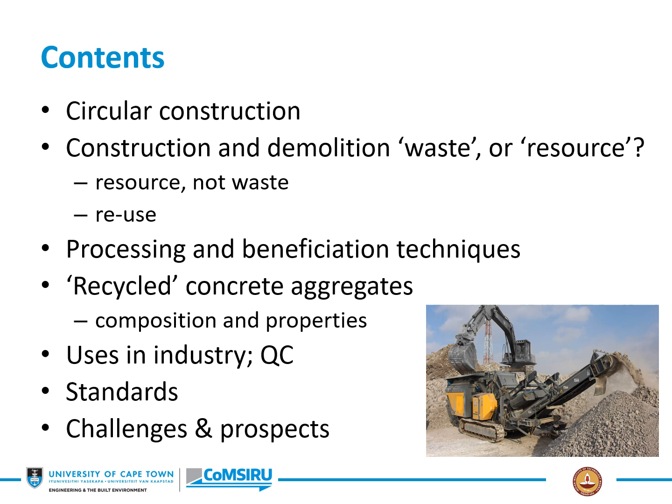This is what I'd like to cover: circular construction, and then construction and demolition waste - or is it a resource? Then processing and beneficiation techniques, recycled concrete aggregates, something on their composition and properties, uses in industry and quality control, standards, and challenges and prospects.

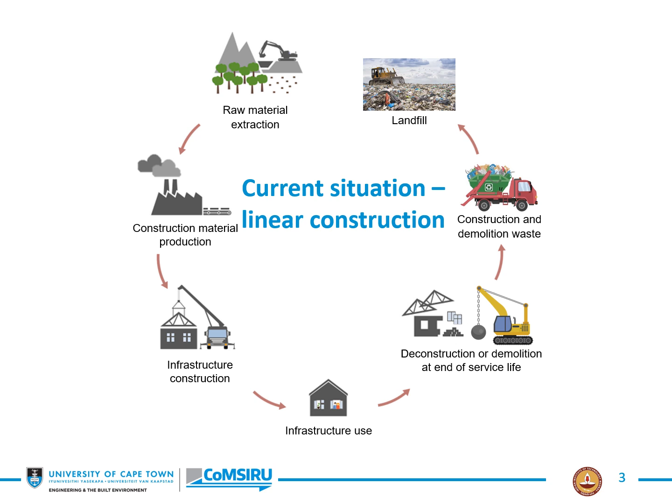This is the current situation in construction in most of the world: linear construction. Although this is a circular diagram, in fact it's a linear system, because from raw material extraction through the construction phase and then the deconstruction phase, we'll end up in the landfill, and that's a linear system. This is no longer acceptable.

We need to move to a circular construction system where, at this stage at least, we intercept the waste stream, process and beneficiate it, and turn it into useful materials - in this case, possibly recycled aggregates. We could, of course, stop at this point and deconstruct the system and even use whole structural members again, but this system is now required.

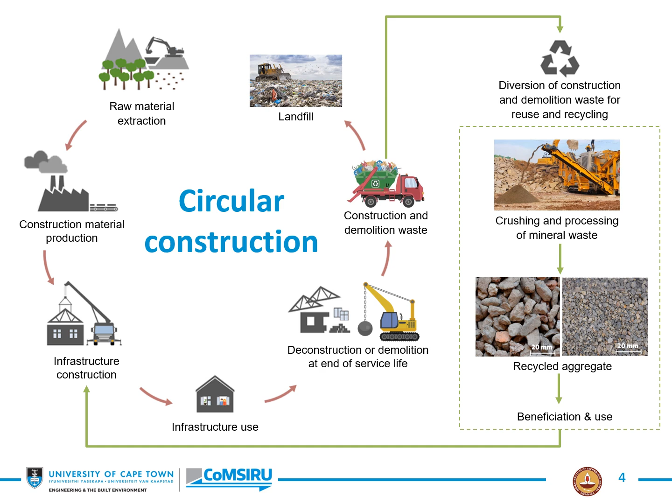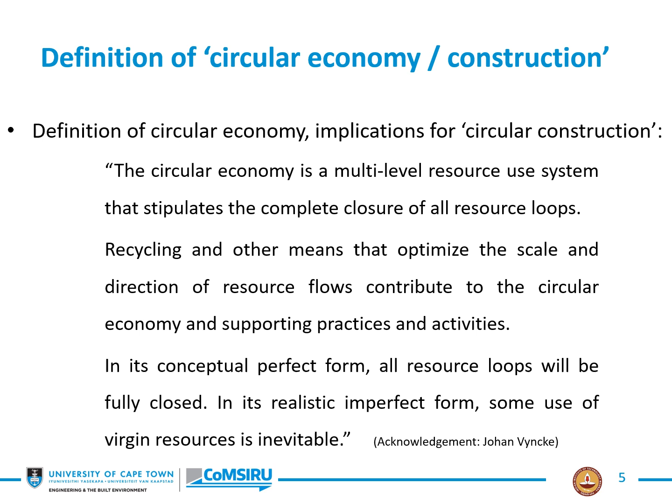Here's a definition of the circular economy, or circular construction, if you like. The circular economy is a multi-level resource use system that stipulates the complete closure of all resource loops. Recycling and other means that optimize the scale and direction of resource flows contribute to the circular economy and supporting practices and activities. In its conceptual perfect form, all resource loops will be fully closed. In its realistic imperfect form, some use of virgin resources is inevitable. And I acknowledge Johan Vyncke for that quotation, past president of Rilem.

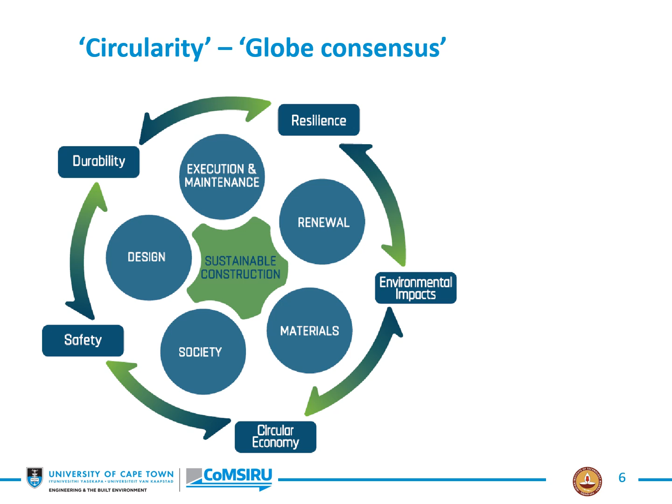We might also be well aware of this diagram from the Globe Consensus, where circularity is defined. Here's sustainable construction - these are the elements that contribute to sustainable construction, and the other aspects here around durability and so on and so forth. What we need in the end is functional, durable, and resource-efficient concrete, including use of recycled aggregates.

So let's talk about construction and demolition waste. It's the non-hazardous waste produced during the construction, repair, rehabilitation, or demolition of infrastructure. And it is of variable composition - usually it's some sort of mineral waste or building rubble, but that contains, for example, clay bricks, wood, possibly plastic, and usually metal of some kind, and so on.

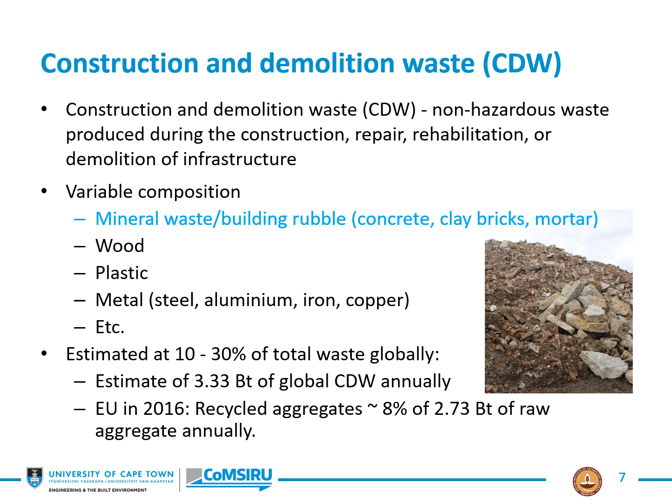Importantly, it's estimated at 10 to 30% of total waste globally. That's a huge number - this depends on the country or the region. There is an estimate of about 3.33 billion tons of global CDW annually, again a large number. Taking the EU in 2016 for example, of the total of about 2.73 billion tons of raw aggregate that was consumed then, only about 8% comprised recycled aggregates. So clearly there's room for improvement here.

But waste here really is a resource, and if we begin to view it as a resource, it leads to a new mindset. For example, the stimulation of a secondary resource economy based on the recovery of material and energy resources from that waste. Also, it's a resource because in this sense we reduce the waste sent to landfill, we reduce the exploitation of non-renewable resources, and we have improved efficiency of material resource flows.

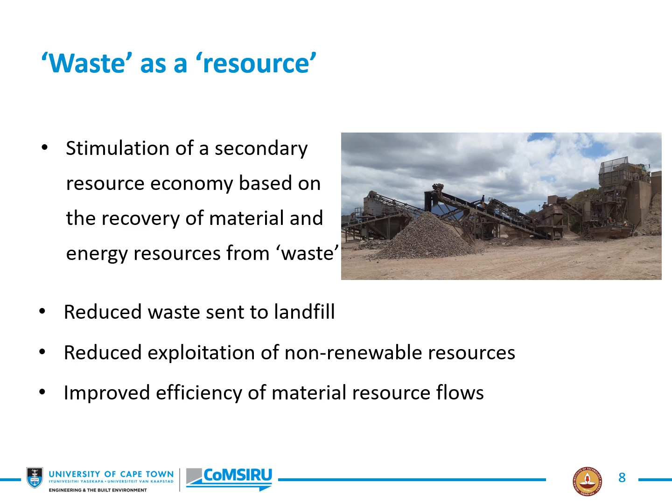Turning to South Africa and CDW in our country, around 4.5 million tons is produced annually, but this could be as high as 10.8 because these numbers are somewhat unreliable. And as of 2017, only about 19% was recovered or reused.

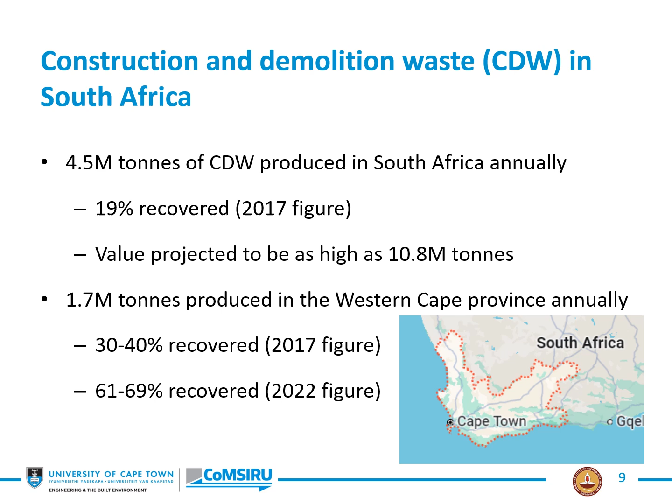And the simple reason was - well, there were two reasons. First of all, the city required a demolition certificate from every owner or whoever was demolishing a building, in which they had to indicate what they would do with the demolished material, indicating reuse. Secondly, the gate fees for the landfill sites were largely increased. And so within the space of a year, this situation was turned around. So it's interesting to see what can be done with proper legislation, proper regulation, and proper motivation.

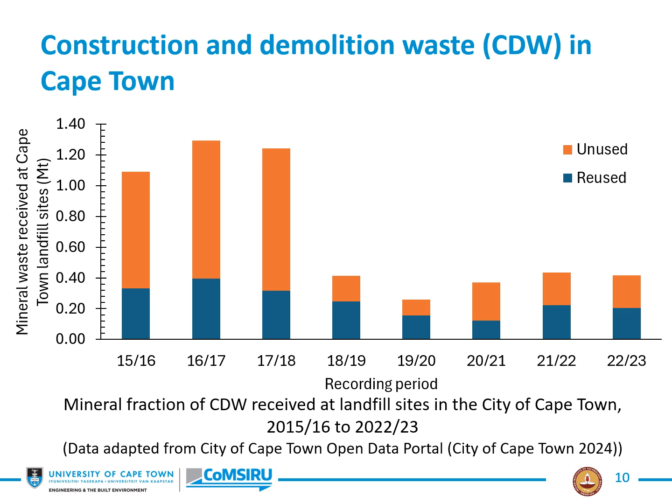Now, with regard to processing and beneficiation techniques, we start with the collection of C&DW. This is an illustration of Chennai in Tamil Nadu in India, where I've just come from spending 3 weeks with colleagues. These dots represent the waste generation points in Chennai in 2013, and you can immediately see the problem: there are multiple sources of C&DW throughout the city, so it's very difficult to collect this economically. What is really required is for the local authority to designate maybe half a dozen or a dozen collection points where people are required to take the C&DW, and from there one can make use of it much more easily than trying to collect it over such a wide and dispersed area.

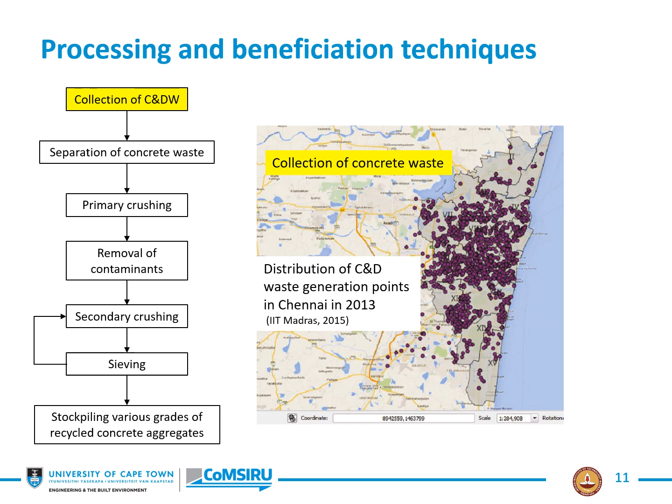That then, of course, one needs to separate it. Here's an example from our own city. There are the mountains in the background, where you can see some mixed waste. Here is some more or less concrete waste, but some soil over there. So really what you want to do is separate at source and not include this in your recycling material.

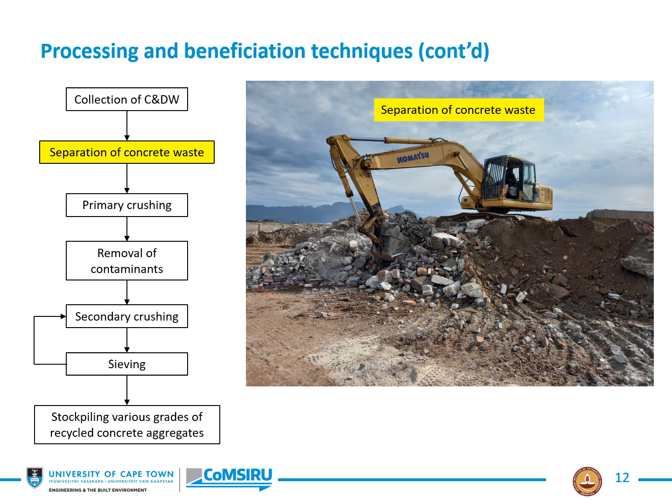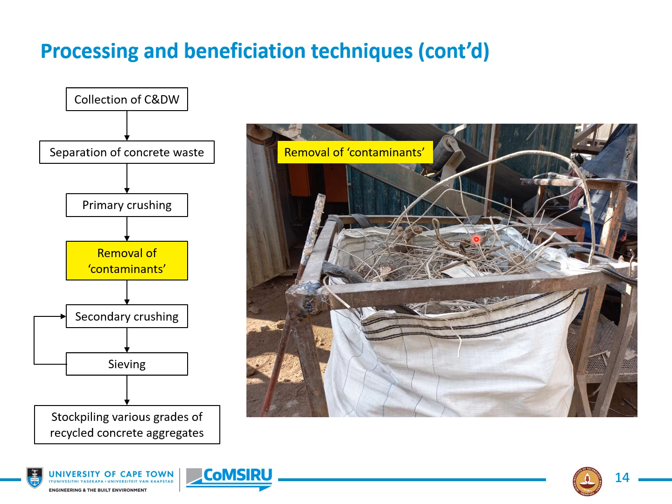Once you've done primary crushing, normally this would be a jaw crusher, which breaks down the large particle sizes, and also removal of contaminants. In this case, you can see the steel reinforcing that has been removed, and of course that itself can be recycled. There are certainly other contaminants that may need to be removed, very often indeed by hand.

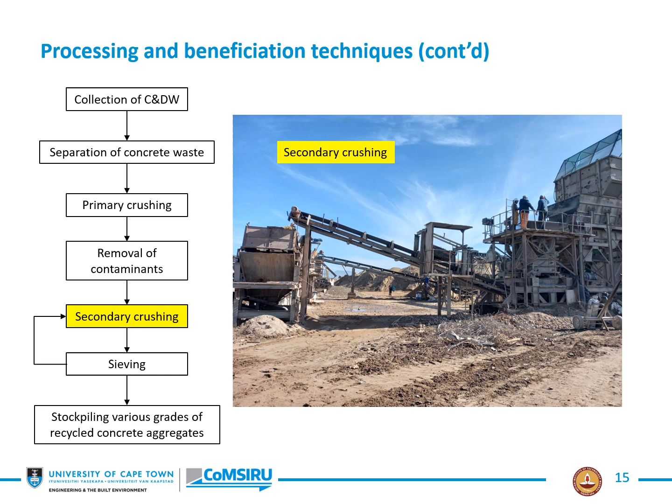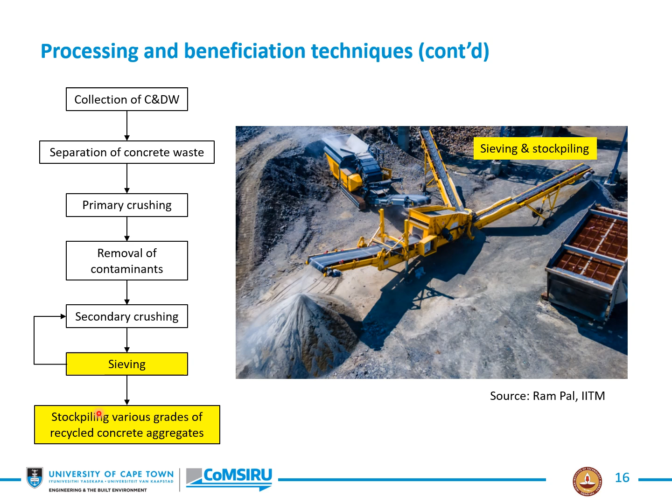One then moves to secondary crushing, and this is also an example from our own situation. Here is a secondary crusher, maybe a vertical impact crusher or something similar, that allows better separation and better particle shape. And then into sieving. So here is a mobile crusher, here is a mobile sieving machine, where from the crusher the stream is then separated into coarse aggregate, or recycled aggregate, and fine material. So we land up with stockpiles of various grades of recycled concrete aggregates.

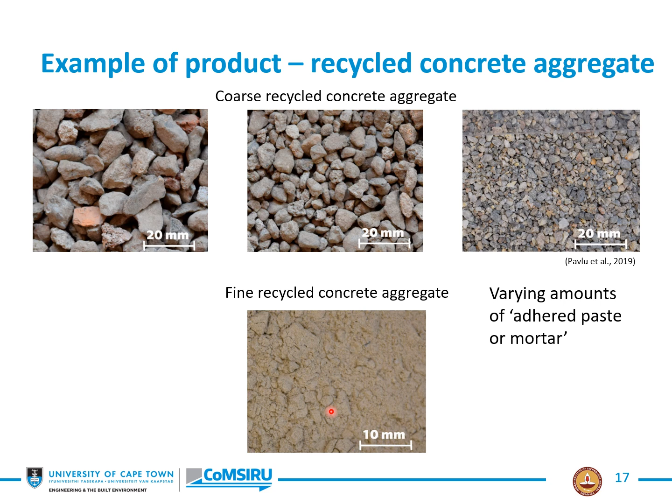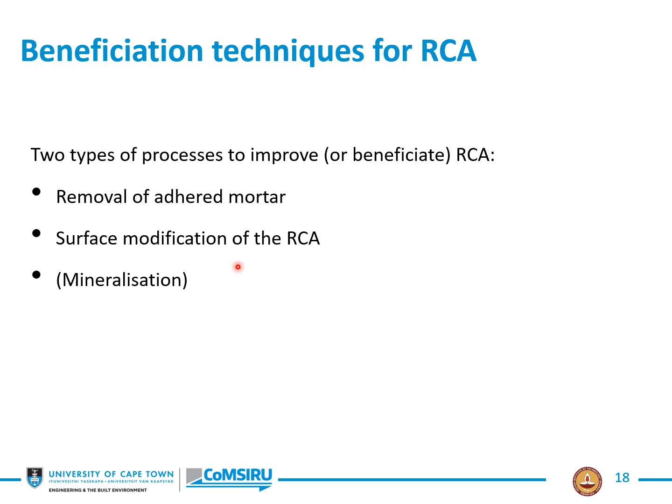There are 2 processes we can use to try and improve or beneficiate the recycled concrete aggregates: removal of the adhered mortar, because it is a problem, or surface modification of the recycled concrete aggregates. Thirdly, there's also mineralization, but I won't deal with that here. For removal of adhered mortar, one can do mechanical scrubbing, acid soaking (not a particularly good idea), microwave heating, conventional heating, or possibly ultrasonic water cleaning, which is also not a very useful idea.

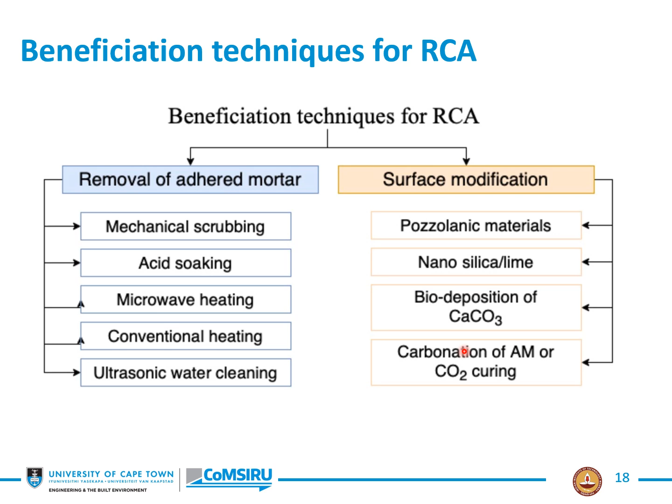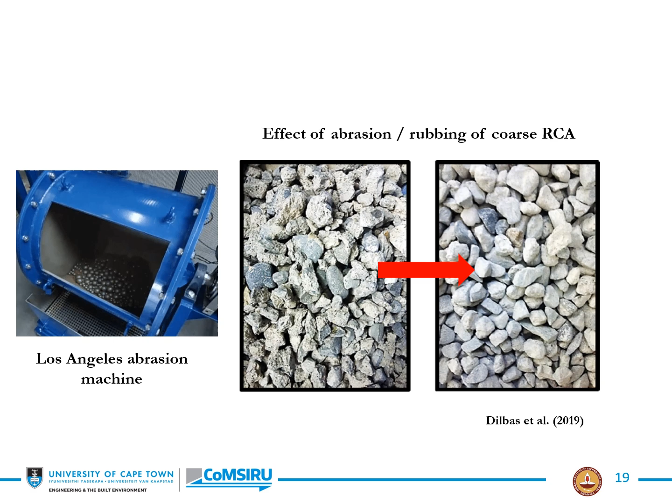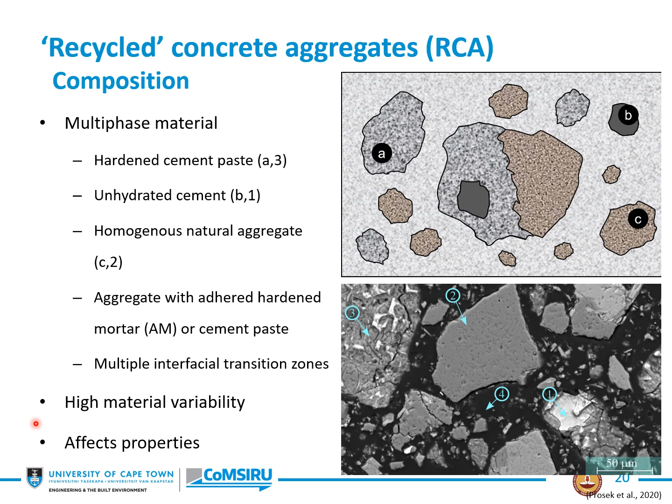The composition depends on the properties and composition of the parent concrete, the crushing procedures, the number of crushing stages, and the end particle size of the recycled concrete aggregate.

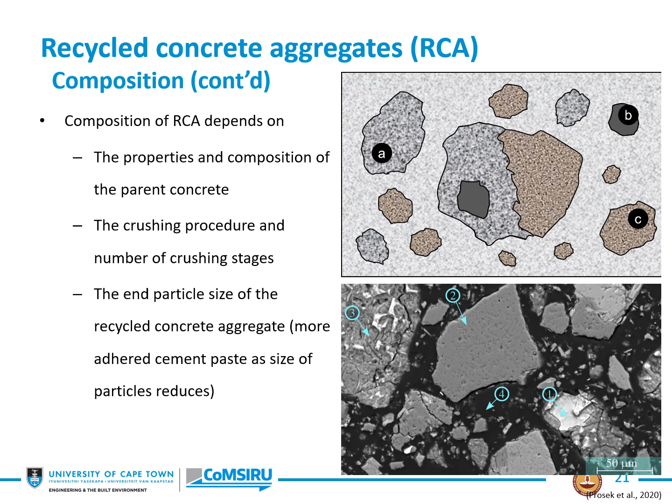As the particle size reduces, you get more of this adhered mortar. Here's a micrograph of the situation. There, in fact, is the adhered mortar and the original aggregate particles. If you just look at this section here, here is the original aggregate with some adhered mortar sticking to the surface, and a whole lot more over here.

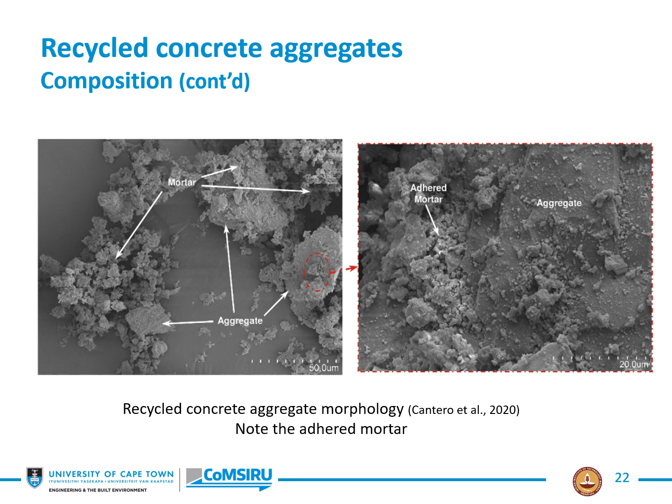This is the material we have to handle in terms of beneficiation. So if we compare recycled concrete aggregate with natural aggregate, we find that it has higher porosity, due to the adhered mortar, lower density, higher water absorption, and higher abrasion loss. As I've said, this is all largely due to the cement paste phases, including the ITZ phases.

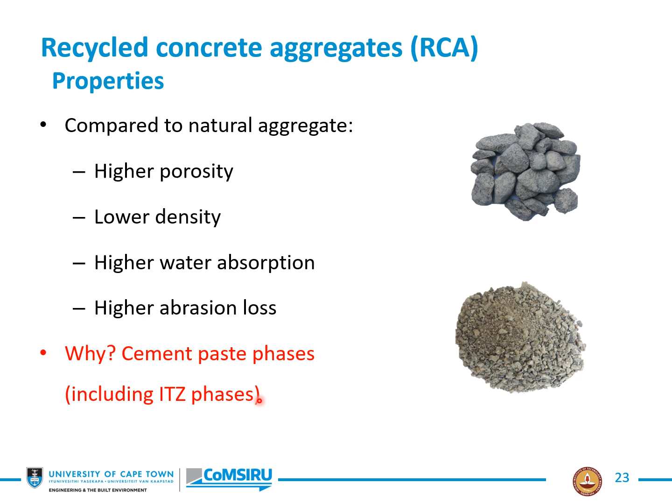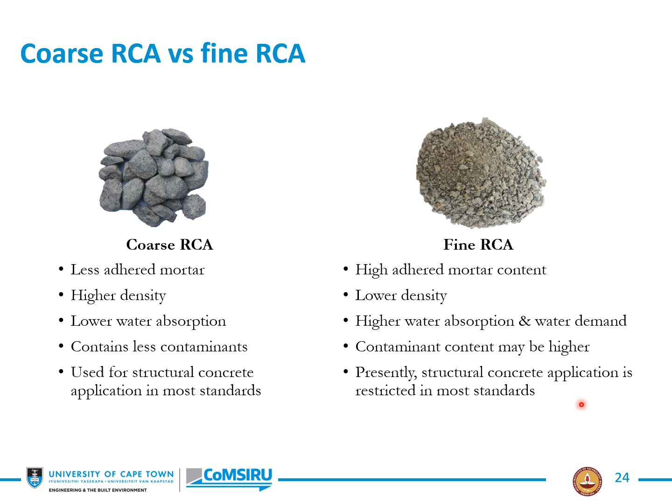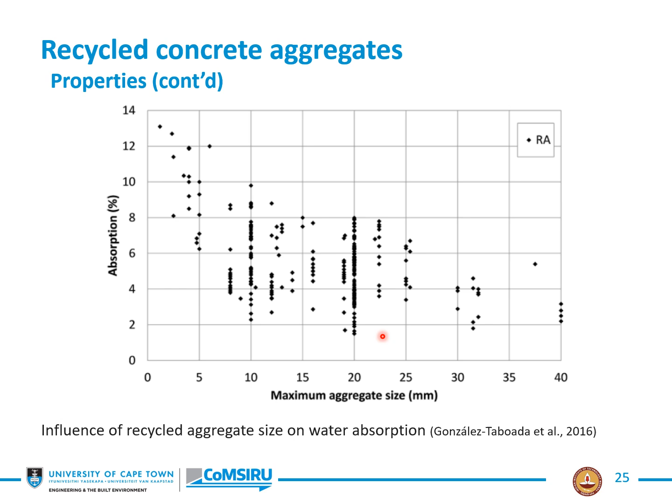For normal crushed hard rock aggregates, bear in mind that the absorption is typically a maximum of around 1%. Normally in South Africa with our hard rock crushed aggregates, we're at around 0.5%, so quite low. So even with this size of aggregate here, around 20-25, you can see that the absorption can be considerably higher than natural virgin aggregates crushed from hard rock.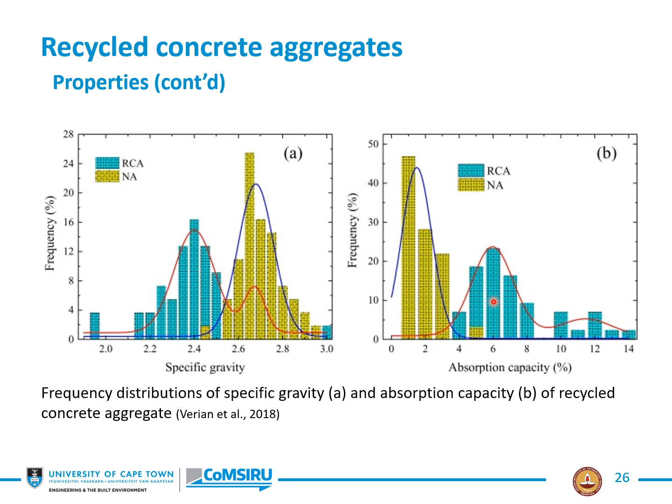This is also illustrated here where we have these frequency plots of recycled aggregate versus natural aggregate. In the specific gravity or relative density plot, obviously the natural aggregate has higher relative density, whereas the recycled aggregate is lower. The other picture is in terms of absorption: the natural aggregate has low absorption, the recycled aggregate has relatively high absorption.

This is also well illustrated in this diagram with absorption versus specific gravity or relative density from a whole series of studies. Here you can see, for example, that the coarse natural aggregate falls down in this area. We then have the coarse recycled aggregate, with higher absorption and lower relative density. And moving up, for example, the fine recycled aggregate is up in this region here, which has high absorption and low relative density.

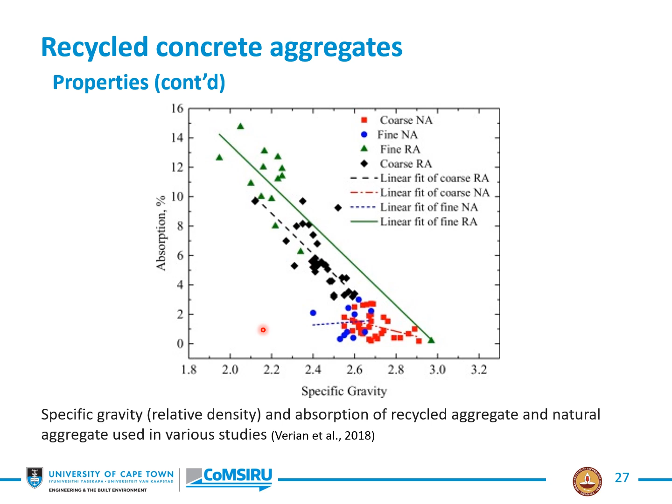Now, structural engineers are always interested and concerned about compressive strength. So what does that mean? Well, here you can see again a high variability of results from a series of references.

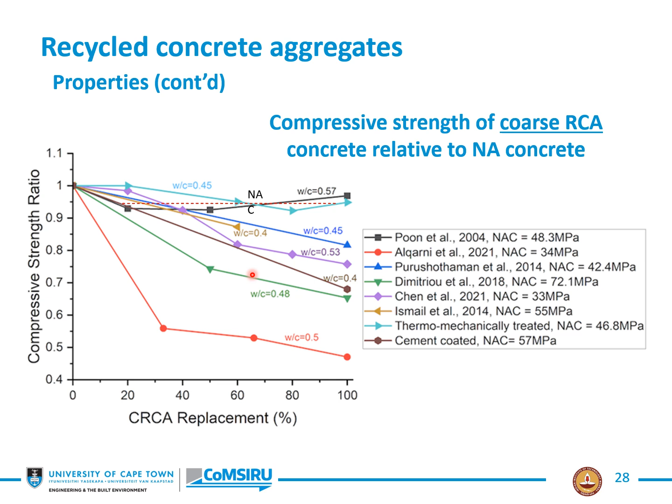The important thing to note is that in many cases, or certainly in some cases, it's possible to get very little reduction in compressive strength of the final concrete, even at 100% coarse recycled aggregate replacement. On the other hand, you can see in this plot, or even some of these, there can be a very substantial effect on compressive strength, which is obviously what we don't particularly want.

With fine recycled aggregate, the same picture emerges, although the data is more sparse. Here you can see again that it's possible to, even at 100% replacement, get reasonable values for compressive strength, but at the same time it's possible to get large reductions in compressive strength. So what this tells us is that every case needs to be considered on its merits and judged accordingly.

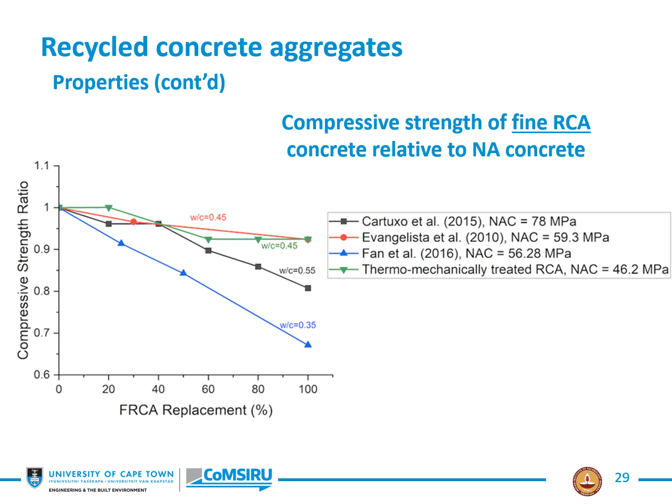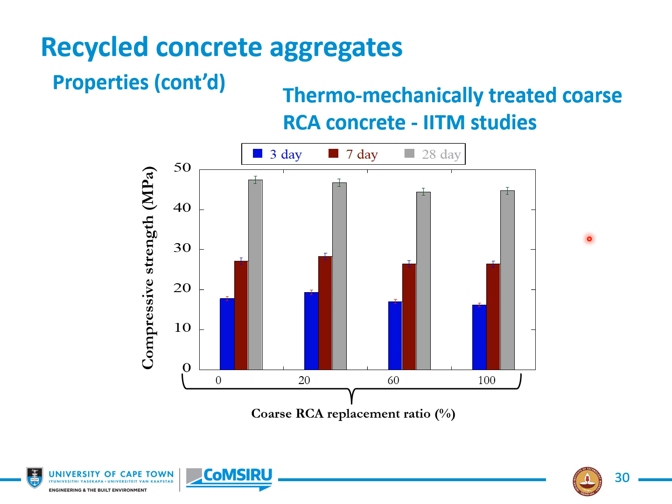Here is an example of a thermomechanically treated coarse aggregate from IITM, where you virtually remove all the adhered mortar by thermomechanical treatment. Here you can see that for 3, 7, or 28-day strength results, there really is very little difference, and this aggregate is, to all intents and purposes, similar to the original aggregate itself. This is coarse aggregate, of course.

Now here's the approach that we've tended to take at UCT, where we've treated the fine recycled aggregates with, in this case, fly ash and slag. Here, fly ash.

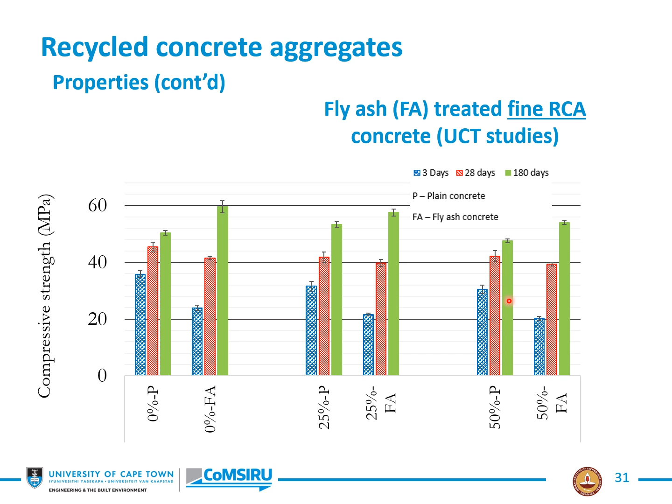Here again, compressive strength at 3, 28, and 180 days. You can see that at 180 days, there's not a lot of penalty to pay using 50% fly ash replacement in a fly ash concrete. The same is seen in early strengths, a little bit lower here.

If we look at the OPI, or oxygen permeability index, of plain concrete and fly ash mixes, this is again a fly ash mix with up to 50% replacement. There's a little reduction, but not substantially so. In other words, we're able to make up to 50% replacement of the natural aggregate and still get very good properties, even at 28 days. Bear in mind anything with a value over about 10 OPI is actually a very good concrete from a permeability or penetrability point of view.

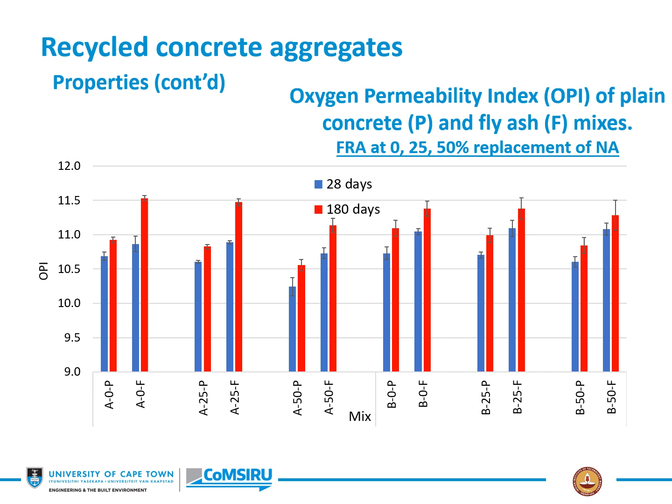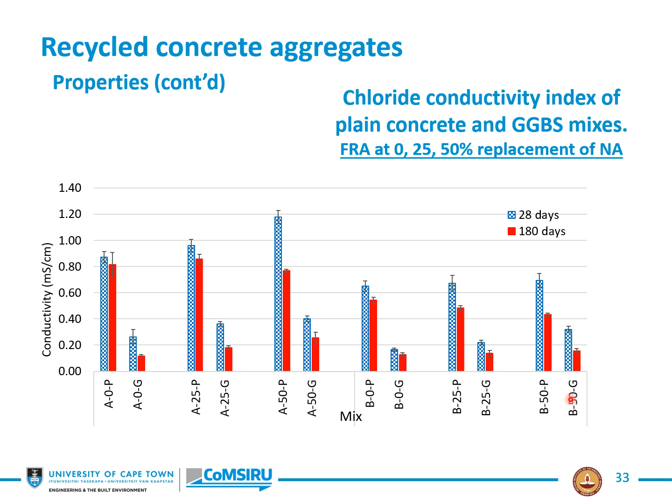If we look at the chloride conductivity index of plain and GGBS or slag mixes, the same picture emerges. The slags have very substantial effects on bringing down the chloride conductivity, as we know. But the recycling of the aggregate, fine recycled aggregates in this case, has no major detrimental effect, even up to about 50%. So it's possible to do this. This is good, and these are excellent.

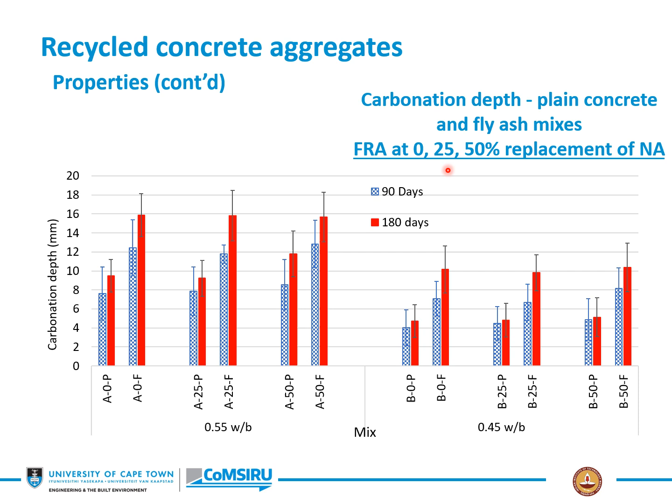Here is something on carbonation depth and two different water binder ratios. Obviously, as you would expect, the lower water binder ratio gives you the lower values. Again, the carbonation depths are not adversely affected at these different ages by the use of fine recycled aggregate at up to 50% replacement.

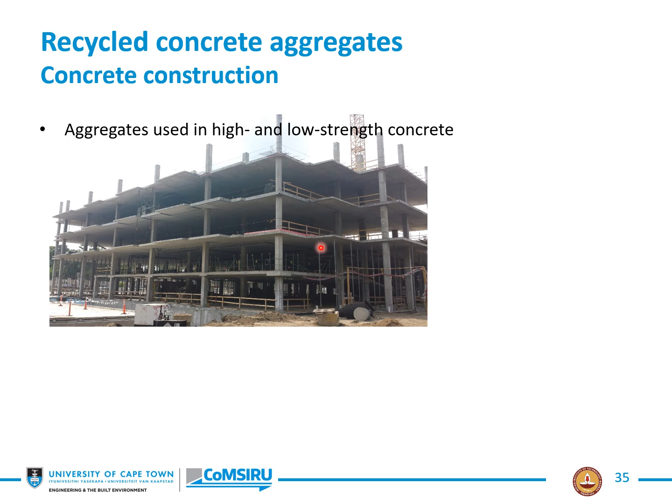So, what about use of these materials? Well, they can be used in high and low strength concretes. Here's a high strength application, a typical column and slab structure in which these materials can certainly be used, provided that they're properly beneficiated and the properties are understood.

However, in many cases, these materials land up in this type of application: brick and block construction, particularly in the developing world, where up to 80% of cement usage actually goes into these kinds of applications. This is an eminently useful and suitable use for these materials, because here the strengths are lower and therefore quality is less important, although of course not unimportant.

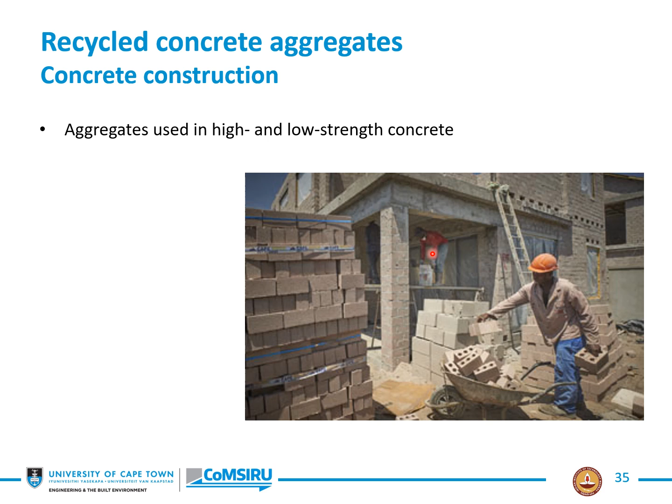But bear in mind there are other possible uses: landscaping, embankments, fill or hardcore material, other construction, or pavement construction. Here you see an example of a road base from recycled concrete aggregates, where they're going to put the topping layers on, and this is very acceptable if it's okay with the standard.

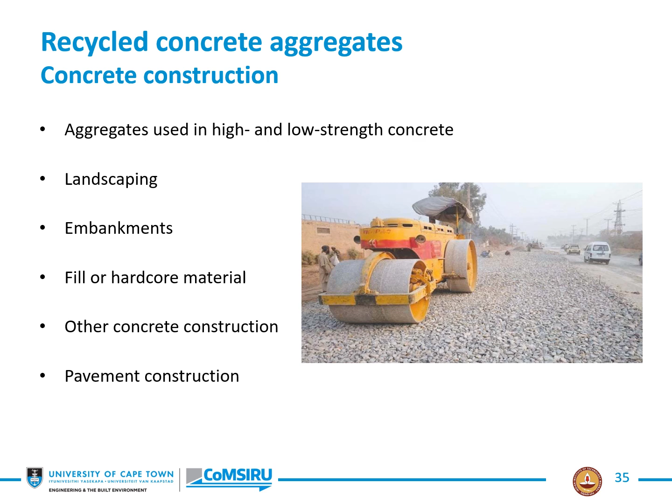Quality control is an issue, however, because we have this variable material. We have non-uniform properties; parent concrete quality and its properties will affect that, the method of crushing and processing, and of course contaminants. Even a small amount of, for example, brick can have quite a big influence on the properties of the material. So we really need to think of selective deconstruction, where we actually take out the demolished concrete at source, rather than as a mixed waste. That results in reduced contamination and improved consistency.

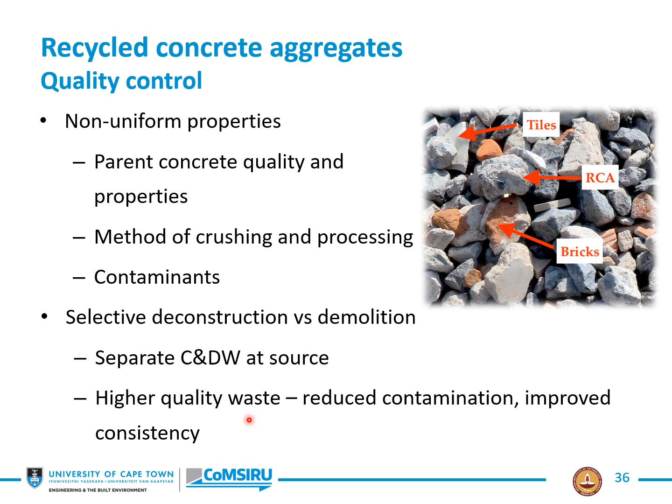So, QC, or quality control. Here are some standards just to show you what is available for the use of recycled aggregates, and there are a whole series of countries given there. Looking at India, you can see that for non-structural concrete, up to 100% of both coarse and fine aggregates are acceptable. In reinforced concrete, at this stage, only 20%.

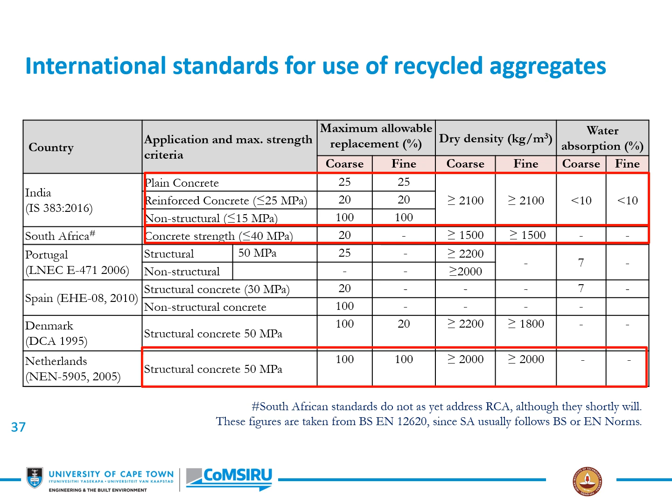In plain concrete, 25%. On the other hand, if we go to the Netherlands, or South Africa, we're a little bit behind, only 20%. But in the Netherlands, you can use up to 100% of both coarse and fine, and clearly they've made great progress here and know how to beneficiate and use their material to the greatest extent. You go to other countries, Germany and so on, Australia, Hong Kong, right down to Switzerland. Again, the picture is mixed; sometimes only low values, but in other cases, you can go up to even 100%.

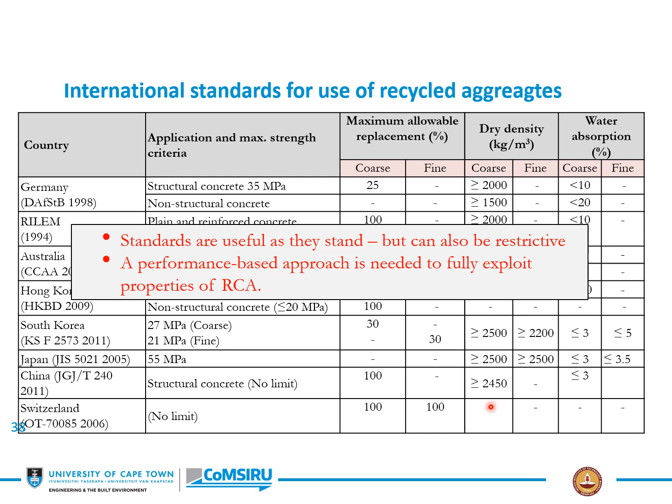Here, again, quality control is crucial to the use of these materials effectively. So standards are useful, of course, but they can also be restrictive. They can limit things when they don't need to be limited. And therefore, a performance-based approach is needed to fully exploit the properties of RCA.

What about the prospects of the use of this material? Well, the overall regional or even national situation should be in focus, considering other possible uses. What we need to do here is to optimize the entire cycle, not just the concrete cycle.

For example, it's not necessary that recycled concrete aggregates must go back into concrete. As I've explained, they can go into other uses. So one really needs to take a regional view of these things. In other words, look at a whole region, see where materials are needed, and see where one can replace virgin materials with this material if it's not likely to be used in concrete. In that way, one can optimize the use of these materials and achieve the lowest possible environmental impact.

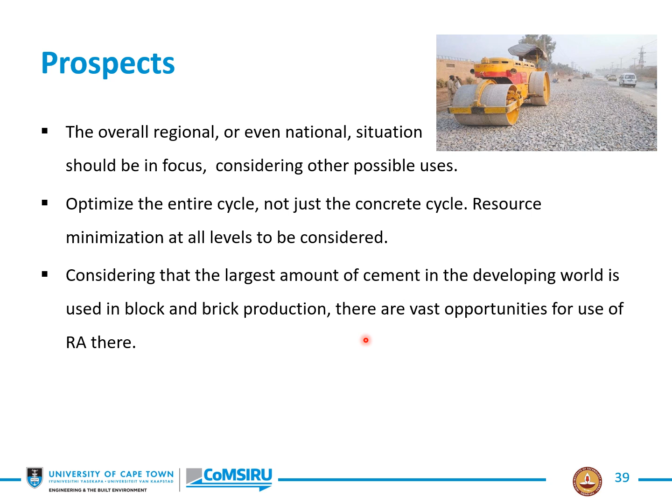That's an important fact. As I said, considering that the largest amount of cement in the developing world is used in brick and block production, there are vast opportunities for use of recycled aggregates there. Newer technologies also, such as the Loesch selective crusher, may allow much more efficient use of CDW.

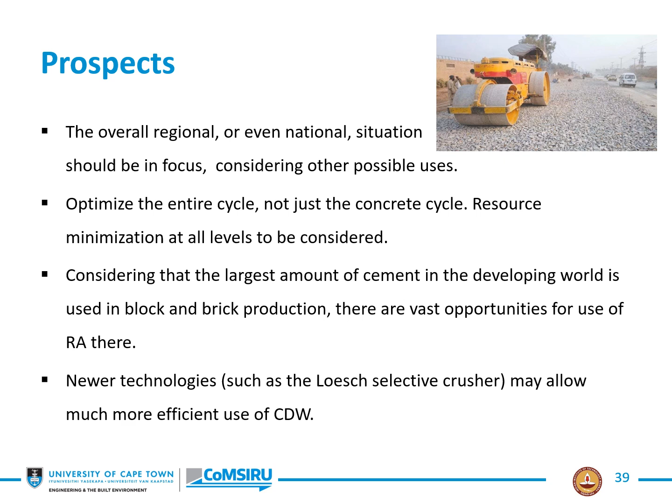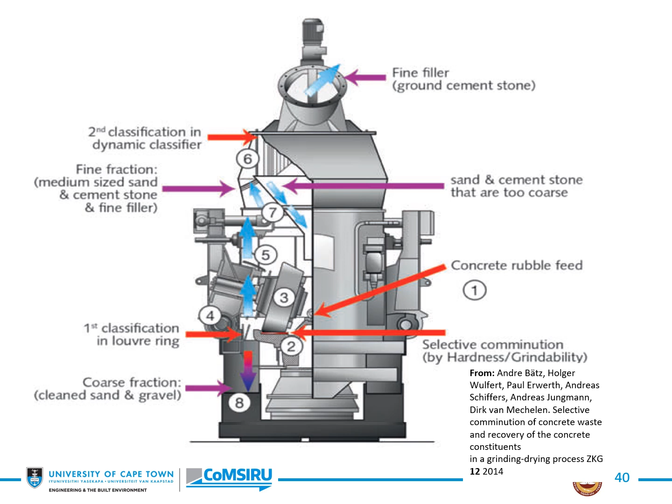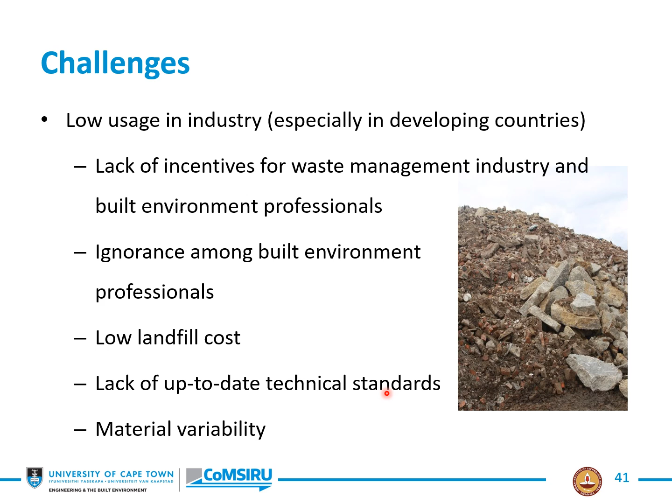Ignorance amongst built environment professionals is another challenge. The first reaction when you suggest the use of this material is, well, I'm not sure, is it going to do the job for me? Because there's simply lack of knowledge or ignorance. Low landfill costs contribute to this, along with lack of up-to-date technical standards, and that ever-present material variability that I have referred to.

But there are prospects indeed. There is a suggestion that over the long term, building obsolescence may reduce, but there is a tremendous stock of aged structures that will still need demolition in the next decades. So this material will be around for literally decades to come, and we must make the best possible use of it. Also, pressures are likely to grow to recycle entire buildings by repurposing them rather than demolition.

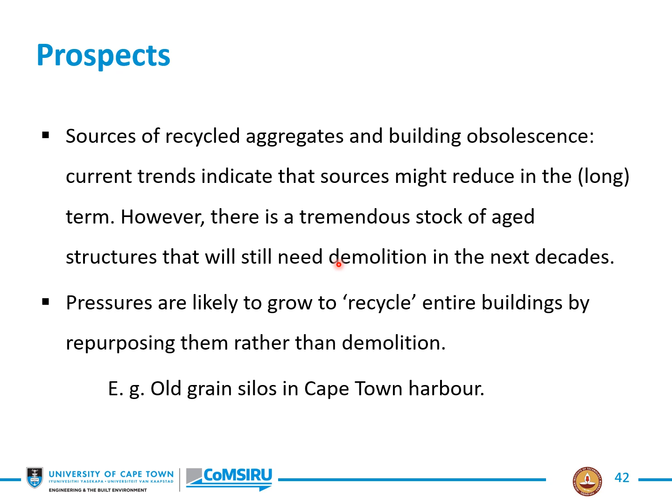This is where I love to use the example of the old grain silos in the Cape Town harbour. Here they are - about 100 years old, or they were 100 years old about 10 or 15 years ago when they were repurposed. You can see the damage due to corrosion and spalling of these structures. Obviously, they're in a marine environment, so you would expect that. The question was, should they demolish or should they repurpose those structures?

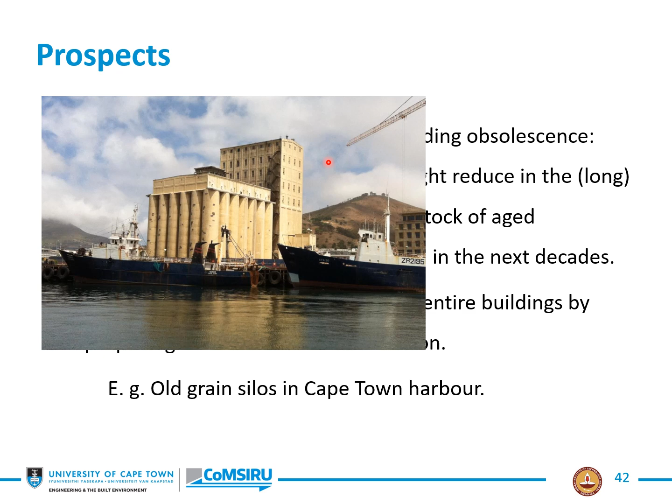The decision was to repurpose them, and you can see the effect here with the finished product. In fact, this section is now the Zeitz MOCAA Art Museum, a modern art museum which is very popular with visitors. And this is a very expensive boutique hotel where I could certainly never afford to spend a night. But you can see that it's turned into a very attractive structure that attracts many people as visitors.

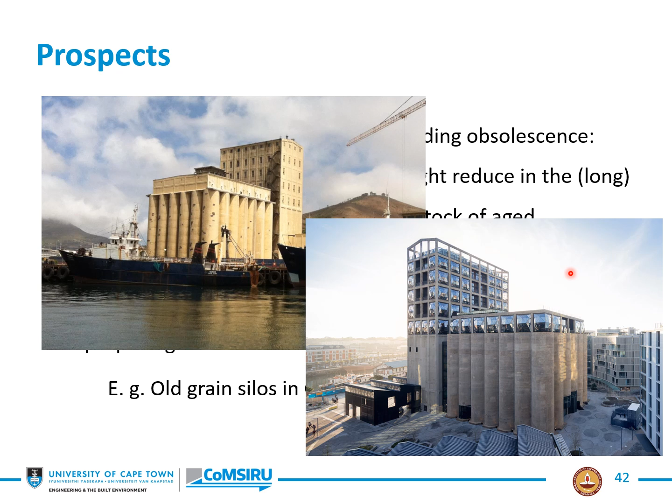And even more so because when you get into those silo structures, you see that they've cut away the old silo walls like this and created a very aesthetic interior for the art museum with proper lighting and so on. The effect is actually quite stunning. So this is a really wonderful example of how old structures can be repurposed and demolition can be reduced.